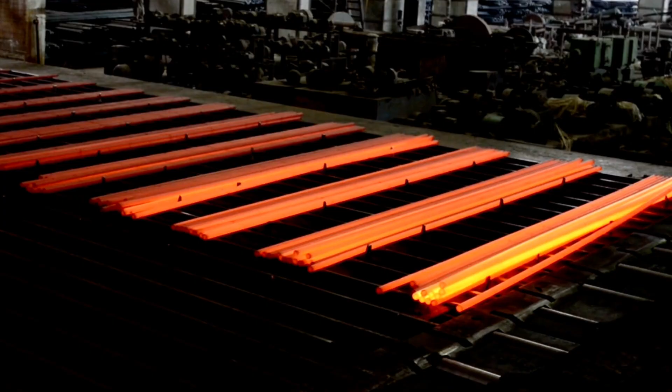The production of steel is responsible for roughly 7% of global greenhouse gas emissions. With half of all steel going into construction applications, engineers play a huge role in reducing that footprint. So what can we do to design smarter and build greener?

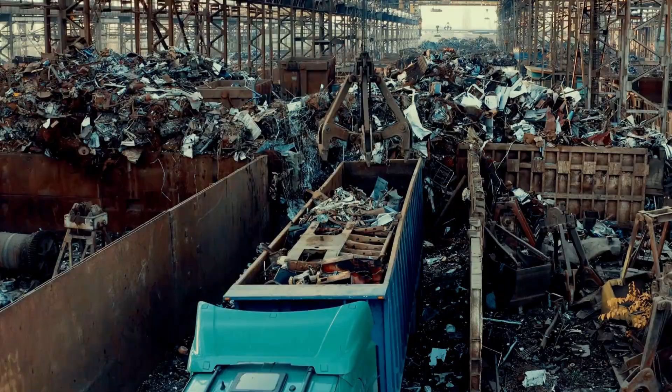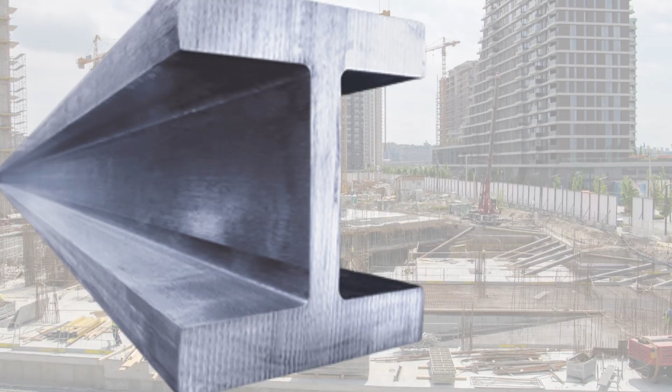One solution to this problem is ASTM A913, a high-strength, low-alloy structural steel with a yield strength up to 80 KSI. A higher yield strength means engineers can achieve the same load-carrying capacity with a smaller section size. For strength-controlled applications, like gravity columns, long-span transfer or outrigger trusses, and steel concrete composite elements, this can reduce the amount of steel required by more than 30%.

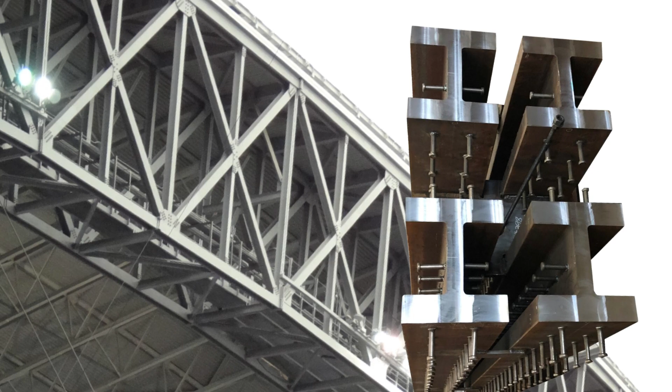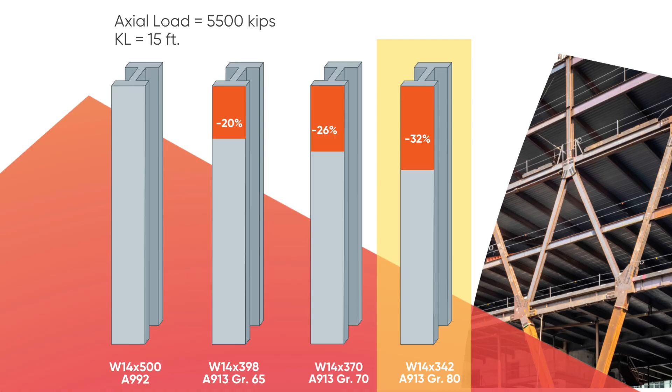We can see this concept applied in this gravity column example. Under a given loading and unbraced length, the size of the steel column is reduced as yield strength increases, all the way up to a 32% weight reduction utilizing A913 grade 80. Simply put, less steel means a lower carbon footprint to produce materials and a lower embodied carbon for your project. That's only part of the story, though.

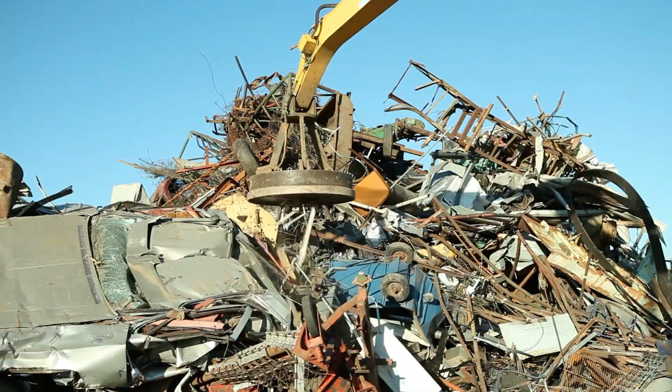ArcelorMittal produces A913 at its Differdange mill in Luxembourg, using an electric arc furnace with 98% recycled scrap. To understand why this matters, we need to talk a little bit about steel production. There are multiple ways to produce steel, and the method will have a significant impact on the carbon footprint of the steel product produced. The most carbon-intensive method is the blast furnace basic oxygen furnace, where most of the emissions are associated with the reduction of iron ore using coal.

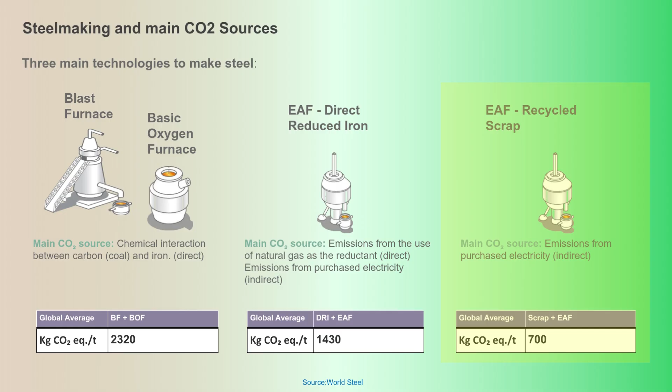Using direct reduced iron in an electric arc furnace is significantly less carbon intensive, as natural gas is used to reduce iron ore into DRI and electricity is used to melt the DRI. However, the least carbon intensive method is using recycled scrap in an electric arc furnace. When scrap is used as a feedstock, there is no iron ore to reduce, eliminating the need for coal or natural gas-based reduction. That also means that A913 falls on the far end of the spectrum. But there's still more to this story.

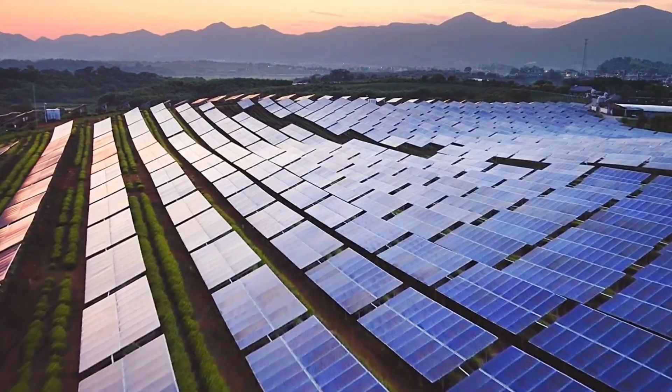Electricity. In scrap-based EAF steel production, the electrical grid is typically the largest source of embodied carbon. When the grid relies on fossil fuels, the carbon footprint of EAF steelmaking can still be relatively high. But when the grid is clean, the footprint drops dramatically. That's why ArcelorMittal Differdange stands out. Most of its electricity comes from low-carbon nuclear or renewable sources, allowing A913 to be produced with significantly lower embodied carbon than the same process in regions powered by coal or natural gas.

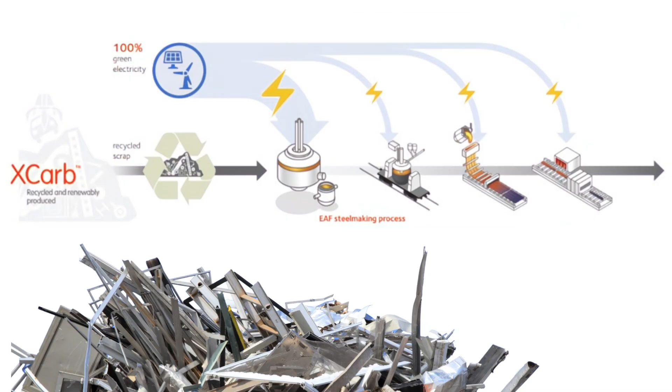This is where everything comes together. First, A913 reduces the amount of steel you need. Second, the A913 that's produced already has a lower embodied carbon because of the process and the electrical grid. Stack these benefits together, and you can maximize embodied carbon reductions on your project. We can still take this a step further with ArcelorMittal's XCarb recycled and renewably produced steel. With XCarb, ArcelorMittal can produce A913 with 100% renewable electricity, driving embodied carbon to its lowest possible level.

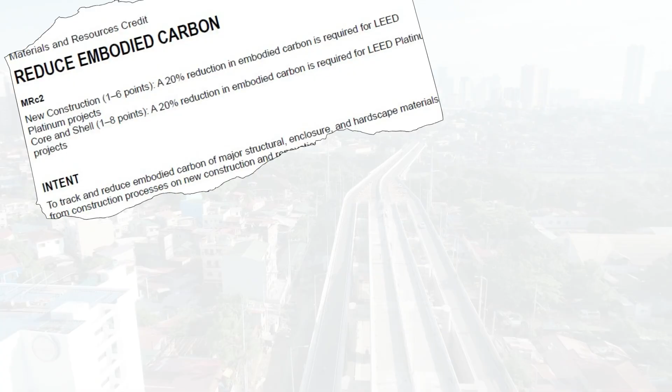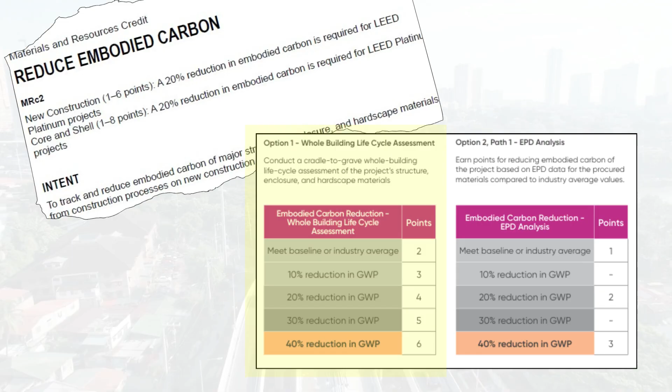This design methodology also aligns with the goals of LEED v5, which places a much higher emphasis on embodied carbon reduction than previous versions of LEED. This strategy can be used most effectively with the Materials and Resources Credit 2, specifically with Option 1 and 2. For Option 1, A913 can be used in conjunction with low embodied carbon steel to show a reduction through a whole building life cycle assessment. For Option 2, procuring low embodied carbon steel alone can help achieve credits through EPD analysis.

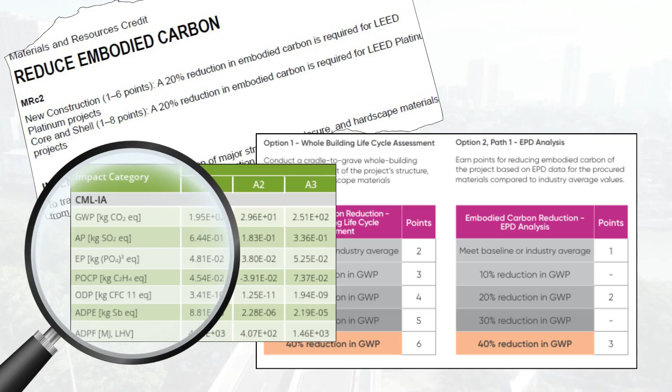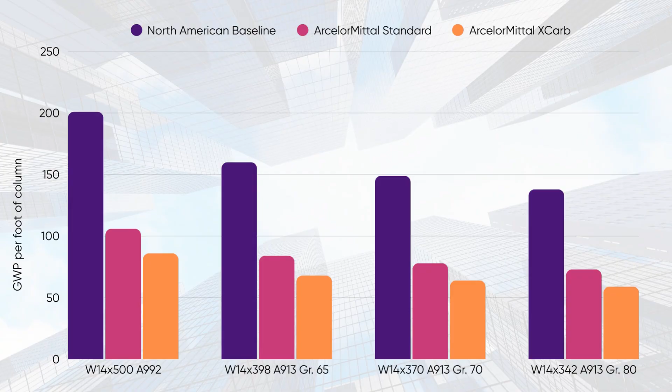Credits achieved through Option 1 and Option 2 individually can also be stacked, which can be used effectively to maximize credits in this category. While a 40% reduction may seem difficult to achieve, when you consider the combined effects of A913 and low embodied carbon steel, the reduction can be in excess of 70%.